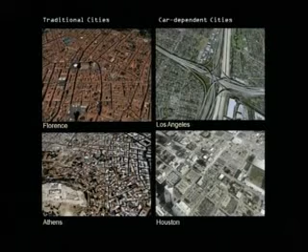The car-dependent cities lend themselves very well to high-rise. So if you look at the kind of massive distribution here on those car organized parts of the planet and think about littering them with high-rise, then obviously that's a fairly easy thing to do. The plots are very low density and therefore can be increased.

But really, for the way human beings should exist and interact with one another, it's really the more traditional cities, the ones on the left-hand side here, that really create the kind of spaces and places that we all know and think about whenever your mind goes to any city around the world that's in this traditional pattern. And those people in those traditional cities don't like high-rise. They refuse them. They don't want them. There's protests against them.

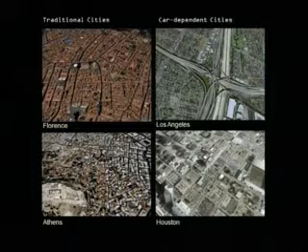So maybe the new city has to find ways of combining the advantages of both of these two approaches in coming forward to create places and spaces within a city context, whether it's markets and where people buy the food, the civic spaces on a grand scale that have evolved over many times, and those quiet and private spaces in cities that are so essential to the way that we live.

If we're going to give an alternative to being out in those suburbs, which we have to, then this kind of space, this quality of space, is really something we need to consider. And it goes all over the world. The nature of spaces and the way they've evolved and been put together - these are places never in any designer or engineer's brief. Nobody asks for these. At best, in the process of designing and planning, we're able to suggest them and incorporate them into a plan. But this is really the focus of where we need to consider what are the places for people and how do we want to live.

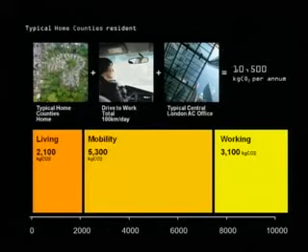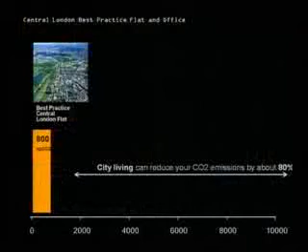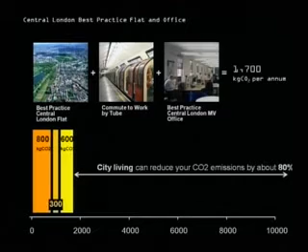To emphasize this a bit more, this is a survey we did in London about that way of living outside in the suburbs. This analyzes the tons or kilograms of CO2 used per annum. If somebody lives outside in the suburbs, drives to work and back every day, and works in a typical air-conditioned building in the center of the city - there's a whole range here, from hybrid cars, eco-homes, trains, all the way down to living right in the center of a city like this, where you live in a good performance apartment, use public transport, and your office space is state-of-the-art in environmental performance - 80% less. So in the same city, you can get people living outside versus living in the center, consuming a huge amount less in terms of creating CO2.

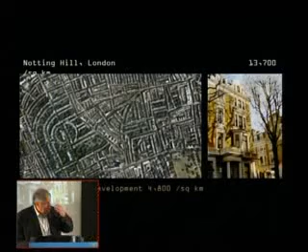Density has got a bad name. People don't like density in many, many places. It's kind of ironic that throughout the world, particularly in European contexts, some of the most expensive property is actually in very dense areas. You can see here this is about 13,700 people per square kilometre, and a typical modern development would be far, far less than that. It's not an unpleasant way of living, in terms of space and residential design.

Now, every now and then there's an opportunity that can focus thoughts about how we should bring together our cities. But it's very important that when we do so, we focus on the context in which they're located. We're very privileged - many of us, probably a lot of people in this room, are working on this project in Masdar. I'm here merely as an ambassador for it. A lot of what I'm going to say and put forward really is the work of a lot of people, all focused with the intention of considering sustainable city design in this rather hostile desert environment in Abu Dhabi.

It's quite interesting to think about the fact that air conditioning, the kind of space we're in, has really only existed in a really intensive way for about 60 years or so, maybe since after World War II. Its distribution around the world has given us this way of thinking - that we can create a space like this and cool it. But if you go back before that influx of air conditioning, you realize there are thousands and thousands of years of development of people in different climates who have been very ingenious about mitigating the conditions they find themselves in.

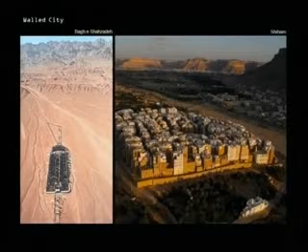So when we started to consider the master plan for Masdar, we really wanted to understand exactly how, by using design in the way traditional cities had evolved in this kind of climate, how they really worked - or what could we do? Can we use some of those spaces, and can we create a different attitude towards their thermal performance in particular?

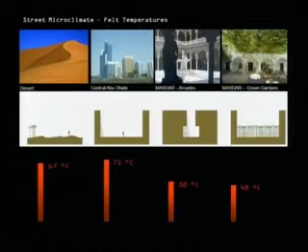You can see here, from the open desert, these are felt temperatures - what it actually feels like to be in the space. You can cause considerable drops, literally, by configuring buildings and spaces. It's very good to go and study these locations, to physically be there and think about the dimensions - you see the buildings are very close together. It's something that design in the world, probably since the fire of London, has been fighting against - everything should be opened up. Sure, that should be the case in northern European locations, but here, where the sun is so intense, the idea of bringing these walls together, from a temperature point of view and also to control the light, is something we try to embody within the thinking of the plan.

Masdar really is, in one level, a kind of artificial situation. It's the plot of land that was available, a big-scale plot of land, and it was focusing on what would we put there, what quantum of people and activity would we locate on this piece of land, and also allow area around it to help balance that CO2 equation that's very important.

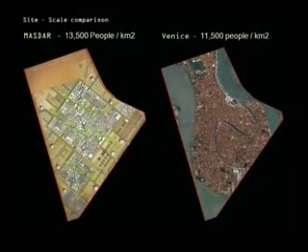You can see here the density is very high, and just in comparison with Venice there, you can feel the grain and the way it actually hangs together.

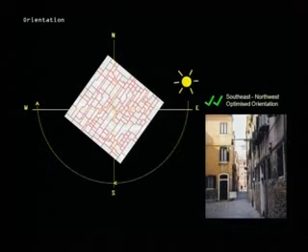In designing somewhere from scratch, obviously thinking about the orientation of the city, where the best position is for sun and for light and for air movement, really evolved into this grid pattern, this sort of off north-south orientation to achieve that balance. It has something like about 90,000 people in its fully developed state who will be living and working on that site.

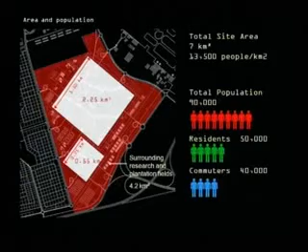It's very important that the uses and the activities in some way emulate the richness of an evolved city. So the uses are not zoned out into particular areas, they're mixed up and integrated together, whether that's industry or office space or where you live. Everything in here should be a 24-hour operation. It should give the life and the kind of excitement of being in a place if it's to be a success.

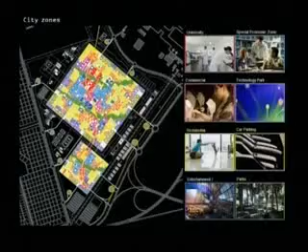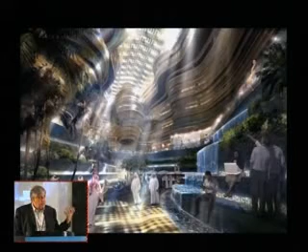This is the master plan in a fully developed form, and you can see the areas around it which are going to be used as part of the development of the university. At the heart of the building here is a university, and this is the way that some of the architecture, very much of today, is trying to bring together some of those parameters of building close, letting light in, letting it come down through into the spaces.

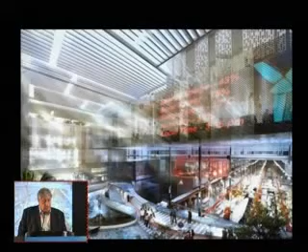Industry, very flexible zones there. As we start on this exercise, we don't know what the industry is going to end up being, so the production space is also very important.

And open areas - not all literally in those narrow streets. The plan opens up to let airflow come through the city, by creating green spaces running through them.

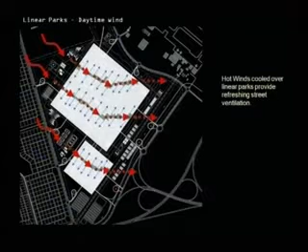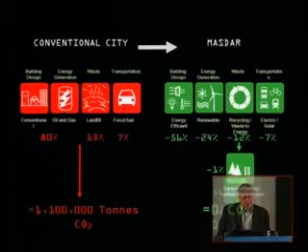It's interesting in this particular climate, there is always some air movement going from the sea to the land and from the land back to the sea, and therefore integrating this with the thinking and the planning from day one. It would be very different here in this climate, but in the context we're talking about, the idea of using wind during the day and during the night to actually ventilate the city and bring air movement down to street level.

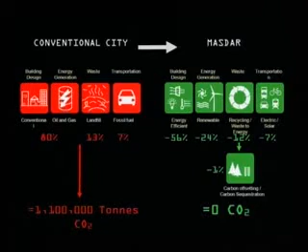In planning, all the parameters that do need to come together to form a zero carbon, zero waste strategy really have to harmonize. There are a number of very large-scale issues, bigger than architecture, to do with energy production, to do with waste management, to do with mobility - all those things that, if one's thinking about it all at the same time, we've got to bring together all those activities and bit by bit, piece by piece, in a very detailed way, really analyze everything down to achieve the targets.

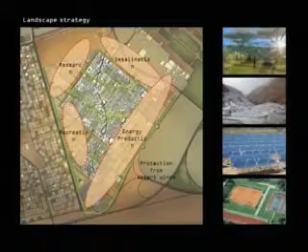This shows you the area that surrounds the central part of the city. Clearly in this location, the obvious source for power would really come from the sun. Scaling that right, with a mixture of photovoltaic cells, thermal tubes, and concentrated solar power is a very difficult balance, and this balance is moving all the time through here.

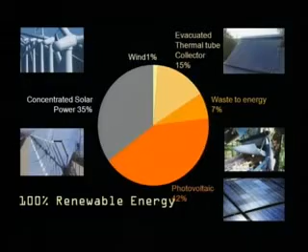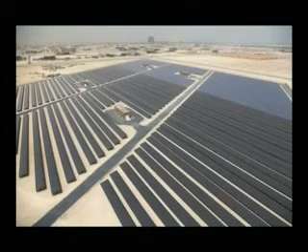Waste to energy is also a key part of it, but it's a big program that needs to be thought about at scale. For the first instance, this 10 megawatt solar plant has now been created. So all the power that's on site for those working on site, up to over 100 people now - and I'm not including the actual people building it, just the people designing it - and also the power for construction, is all coming from this renewable source.

Water is an absolutely colossal problem in any desert environment, and here as well. An obvious strategy is to look at desalination, but you end up with a lot of salt, and quite often from the desalination process that salt's put back into the sea, which seems to be a slightly illogical thing, because it really compounds the problem. So what do we do with the salt?

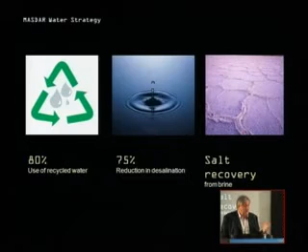Well, Masdar is a university at its heart - the idea of literally having an institute there that can study everything to do with sustainable design. One of the obvious things would be to study what do we do with all this salt. Industry can only take a certain amount. And then things like the complete material cycle, the cradle-to-cradle conversations that we're all very familiar with in the sustainable environment, to actually do it and put it into operation.

You realize on the scale of this, it's not really been done. A huge part of Masdar is, in fact, not so much this project, but the initiative behind it, in order to actually get answers to how you go through this process of analyzing things and how they're delivered. It includes packaging, how much can you recycle, what's the energy cost for recycling, where do we get the materials from. You realize it's a massive matrix which has to be brought together, and part of the objective of doing this is to actually study that and to develop it.

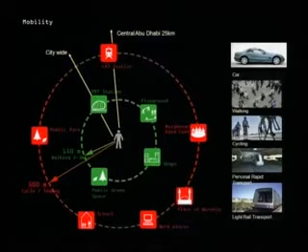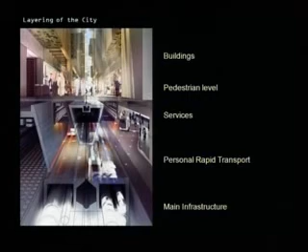We talked a lot about traffic and the way it works, but really it's a mobility plan, right from how far you're prepared to walk. In a very hot climate such as this, it's not very far. So what happens between that and the car is very crucial—how it can integrate with light rail systems and a personal rapid transit system that runs underneath the city. You can see in this section we did that for speed. It's got to be efficient—you've got to be able to get from anywhere in the city to anywhere else, so running that just below pavement level rather than continually stopping and starting at ground level was something we took.

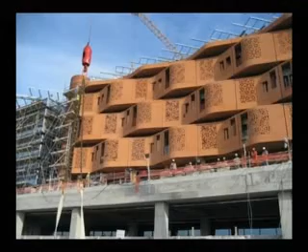And this is becoming a reality. This is the space, the Undercroft area, where that transit system and services will run. So the whole city is elevated up onto a platform, and you can see the construction here moving forward now on that first phase.

The university is a tremendous engine within the city—that red block is the first phase, and it is the institute. It can actually create startup companies and businesses. If its whole curriculum is focused on sustainable strategies, then it has an opportunity to produce something very interesting, and it's very consciously being used as an engine for the development of this location.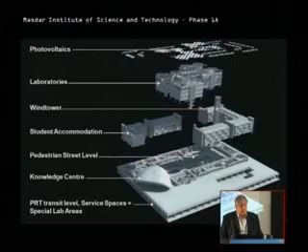This is how the first phase works—it's a mixture of residential and university. The spaces we create in here have to be very flexible. The science being invented, we don't know what it is, so three years after occupation, it's likely that things will need to change. The idea of building such a level of flexibility into these laboratories from the first instance is fundamental to allowing that long-term view to be maintained.

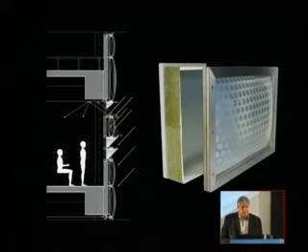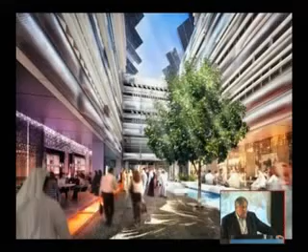It also forces invention. The laboratories do need to be air-conditioned—we need to keep a constant series of results, and therefore how they're insulated and put together, we have to invent new systems and new methods of cladding those buildings and insulating them.

So these are some of the views. This is the student accommodation, with very tall ceilings, part of a natural ventilation strategy we're developing here. Gradually, bit by bit, this is now coming to fruition. The screens give privacy but also allow for a view and let light through, working closely with local artists who have an understanding and feeling for this Islamic language to be incorporated into the overall plan.

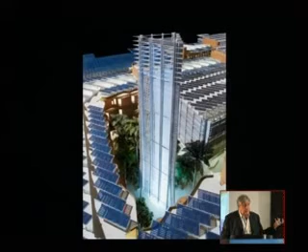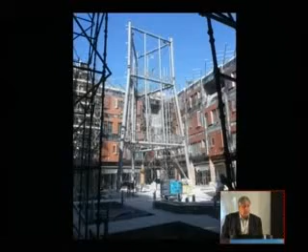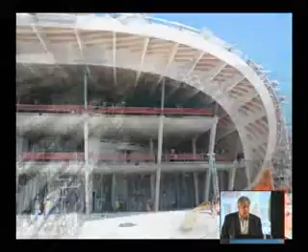And traditional devices such as this, the wind tower—this is our modern take on a traditional wind tower, using the science and technology behind what was a very traditional device but interpreting that in a new way. Here you can see the first one of these under construction now. The Knowledge Centre, another part of the plan, is a real social focal point within the overall strategy of this first phase, coming together and being produced now.

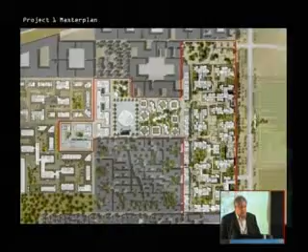Now that's the first phase, which should be completed towards the end of this year, and already the second stage is under development. This is now more residential and more office space, and this looks very much right out to the perimeter of the city, where there's a different set of problems.

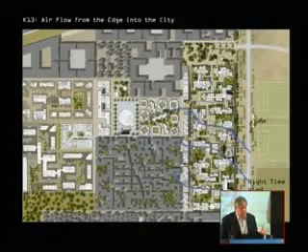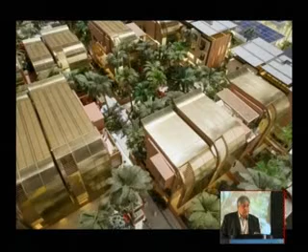When we study that and look at it particularly from an air movement point of view, there's an opportunity to open up on the perimeter of the city in order to allow more air inside. As we move forward in more detail, more knowledge is gained about how those objectives are achieved during daytime and nighttime. A lot of what we're trying to do is literally inform the shape of the buildings by thinking about that airflow over the tops of the roofs, so the design of these allows for that air to be manipulated through the space and around it, using the technology that's ever increasingly available to help us do that.

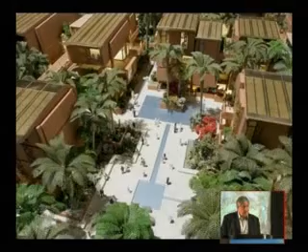And the creation of public spaces amongst that residential area—gardens, in this instance, heavily landscaped, but every tree has been analysed. Every type of tree, how much water it's going to take every day, has all got to be calculated and totaled right through to the end of the project and beyond. There's a very precise set of exercises that need to take place if one wants to prove out the whole concept of this being sustainable.

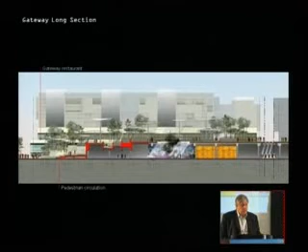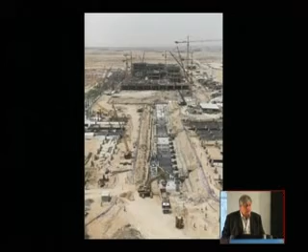These are some views. When it gets to the edge of the city, it steps down, as you can see here—the undercroft then marches down, so there are ways out into the landscape around it. This gives you a view of what that edge condition is starting to be like. All of that new location is already under construction, and all of the piles are in for construction to develop.

We hope the lessons learned from this through time—and it will be a long time as this evolves—become the real legacy of what Masdar is all about, and that will hopefully be used and be relevant in part to other projects around the world. Thank you very much.